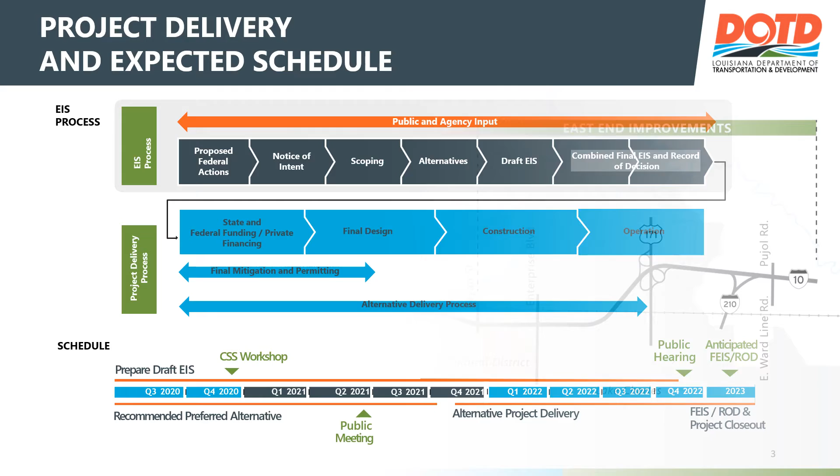The project corridor extends from I-10 at I-210 West End to I-10 at I-210 East End and is approximately 9 miles long. It crosses through the cities of Westlake and Lake Charles, which are connected by the Calcasieu River Bridge. The I-10 Calcasieu River Bridge, several overpasses, and the interstate between I-210 in Sulphur and I-210 in Lake Charles is proposed for reconstruction to meet current design guidelines to the extent practicable.

The segment of LA 378, or Sampson Street, from I-10 to Sulphur Avenue would also be improved. Improvements to interchanges at I-210 West End, Sampson Street, Enterprise Boulevard, and US 171 are also part of this project.

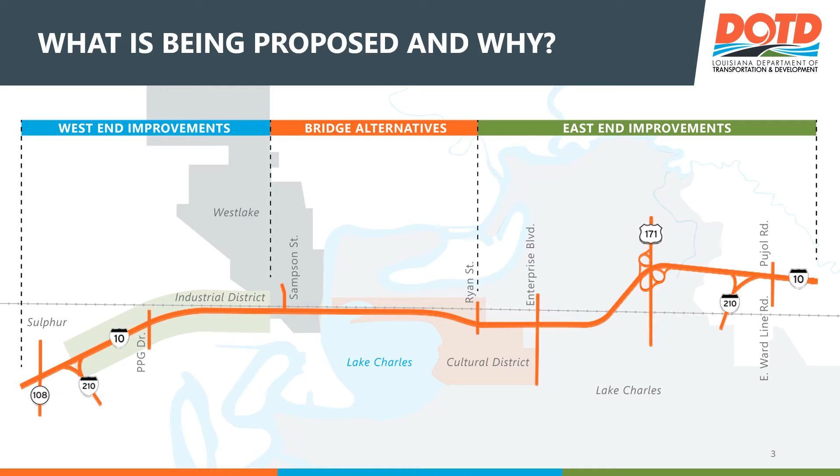A complete range of alternatives was considered for this project. A screening process narrowed these down to 3 reasonable alternatives that were presented to the public in 2021. These alternatives have been evaluated in detail in the draft EIS. The EIS identifies a preferred alternative. The final alternative will be selected in the ROD. Throughout this process, stakeholder, agency, and public input has been considered.

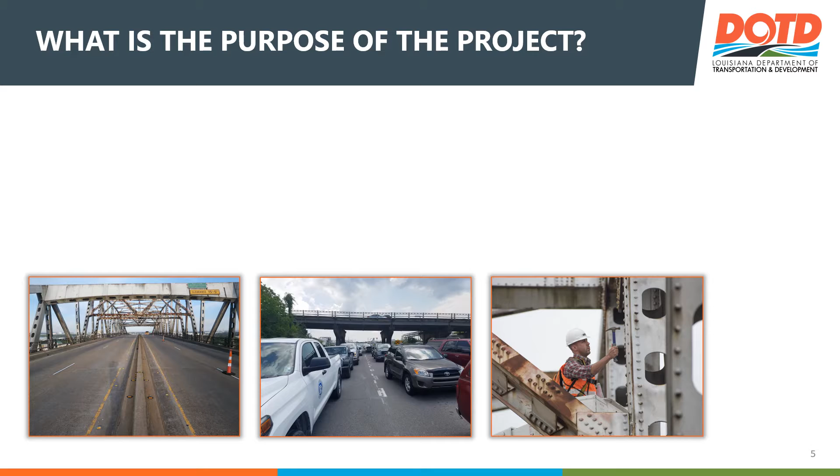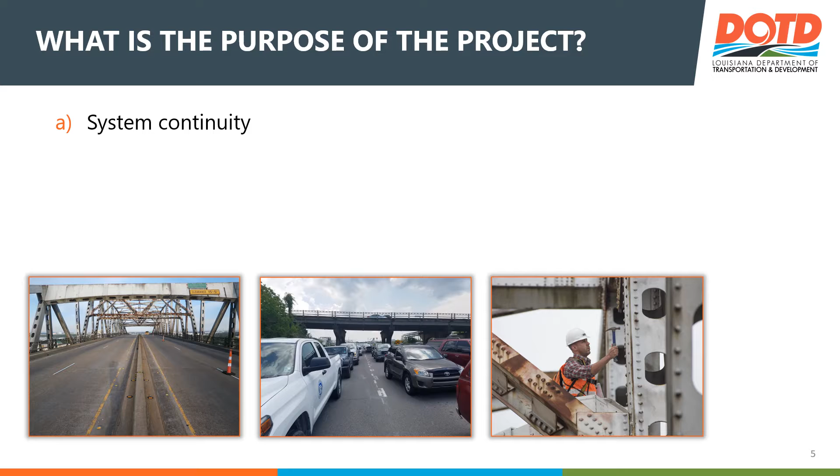Any reasonable alternative must meet the purpose and need of the project, which consists of 4 aspects. A: Address the lack of system continuity on I-10 by adding lanes to be consistently 3 lanes in each direction. B: Reduce congestion and improve mobility on I-10 and along Sampson Street by resolving bottlenecks and delays at railroad crossings. C: Correct structural and functional roadway and bridge deficiencies by meeting design guidelines and replacing aging infrastructure. And D: Address safety concerns on I-10, including the Calcasieu River Bridge.

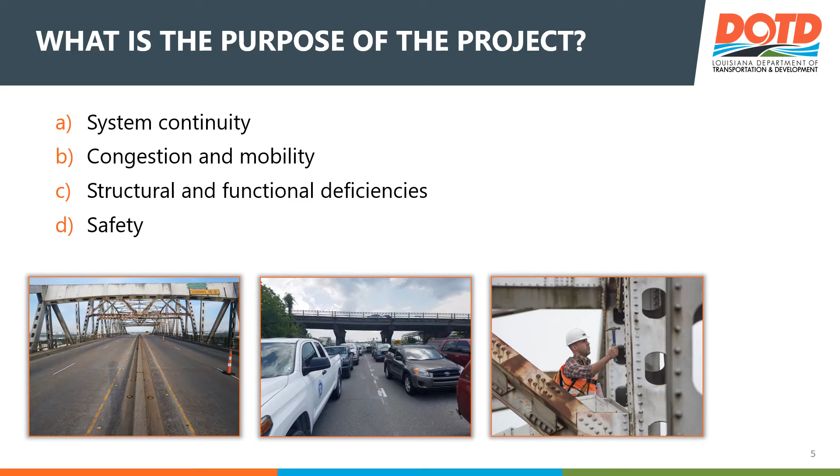Project team members at Station 3 can answer your questions about the project background and purpose and need for the project. Project team members at Station 4 can explain how these alternatives were developed. Large-scale drawings of alternatives 3A, 3E, and 5G can be viewed and discussed at Station 5.

All alternatives would provide 3 through lanes in each direction, change vertical and horizontal alignments to improve traffic operations and eliminate bottlenecks, and replace aging infrastructure such as bridges and overpasses. All alternatives will widen the I-10 Calcasieu River Bridge to 6 lanes at a minimum.

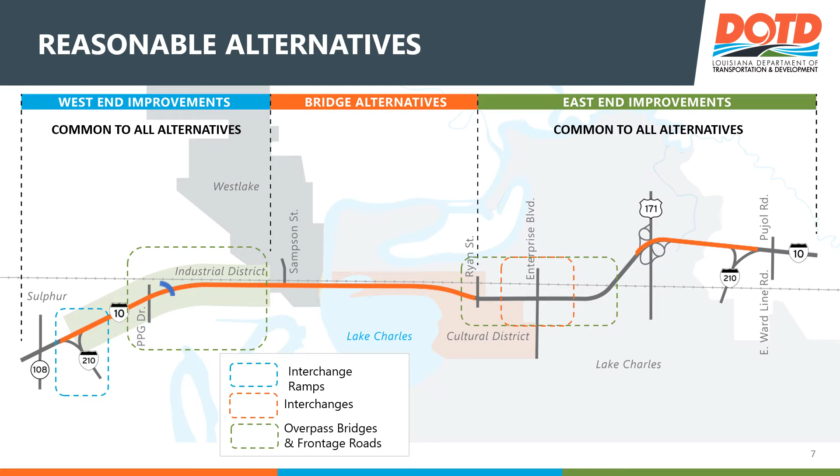Improvements at the west end and east end of the project corridor are common to all three alternatives. On the west end, common improvements include the I-10, I-210 interchange ramp and I-10 frontage roads. The US 90 overpass bridge will be removed. On the east end, common improvements include the interchange at Enterprise Boulevard and reconstruction of overpass bridges and frontage roads from Ryan to Opelousas Street. Some improvements to the interchange at US 171 will be made.

We invite you to review drawings for the build alternatives at Station 5, where project team members are available to answer your questions.

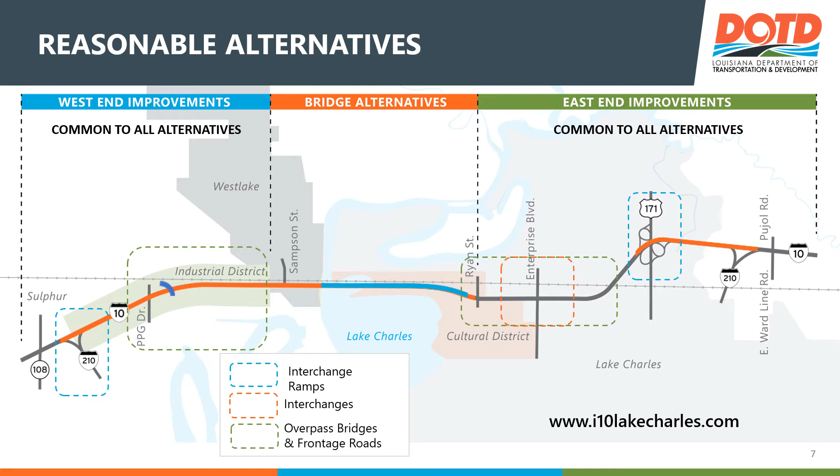Alternative 3A makes no change to existing Sampson Street. The I-10 service roads on the southwest will be improved, but the way the ramps are configured will stay the same. Sampson Street will remain as is and at grade. Traffic on Sulphur Avenue and Sampson Street North will be able to avoid the two railroad crossings of Sampson Street by using an extension of Sulphur Avenue.

A new movable bridge will be built over the river to connect to North Lakeshore in Lake Charles. This interchange provides only one eastbound on-ramp and one westbound off-ramp to and from I-10. North Lakeshore frontage roads will shift to the north along with the new I-10 alignment, but access will not change.

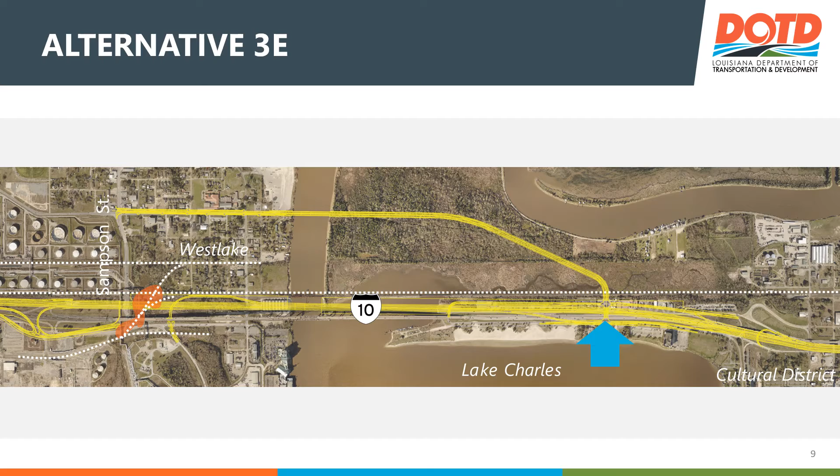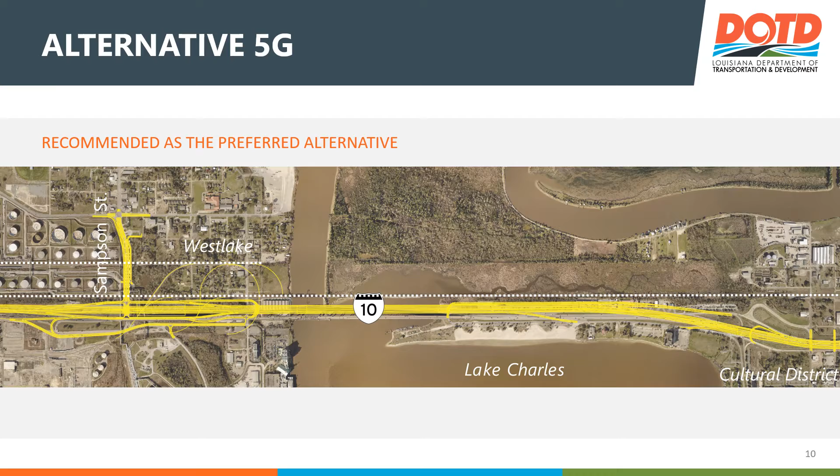The draft EIS provides detailed analysis of environmental effects, both beneficial and adverse. Copies are available for review at Station 8. You can also visit the LADOTD District Office located at 5827 US 90 in Lake Charles, or local libraries in Lake Charles, Westlake, and Sulphur to read the document. You can also access it online at www.i10lakecharles.com.

The following section summarizes the major effects and identifies issues raised by agencies and the public. The section also discusses plans for minimizing or mitigating adverse effects.

A handout with a matrix is available for you to review the environmental effects of each alternative side by side with the no-build alternative. A red highlighted result identifies a comparatively substantive impact on the resource or issue listed. Green identifies the least impact or most benefit. No highlights in a cell means the alternative results are neither best case nor worst case.

The no-build alternative is an analysis of what would happen in the future if nothing is done. It serves as a baseline or benchmark to compare the three alternatives. Even though the no-build alternative might appear to be the best case in some instances, this alternative would not and does not meet the project's purpose and need.

Section 106 of the National Historic Preservation Act protects historic and cultural resources and ensures that they are taken into consideration at all levels of the project.

Three Section 106 resources were determined to be adversely affected by the project: the existing I-10 Calcasieu River Bridge, the US 90 overpass bridge near PPG Drive, and the Norris Point Archaeological Site.

The Louisiana State Historic Preservation Office, or SHPO, agreed that this project would have no adverse effects on historic above-ground resources other than these bridges, both of which are covered by the DOTD's Historic Bridge Programmatic Agreement, or PA. SHPO also agreed that replacement of these two bridges is the most appropriate action. Both bridges were offered for relocation through DOTD's Historic Bridge Marketing webpage.

The Norris Point Archaeological Site is within the new right-of-way for the replacement I-10 bridge, but it is not sufficiently intact to be considered significant. Data recovery of artifacts for curating and study has been selected as appropriate mitigation for this site.

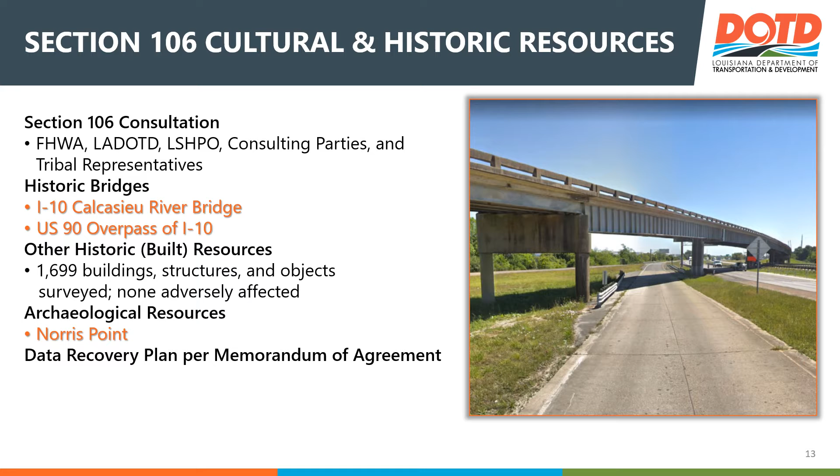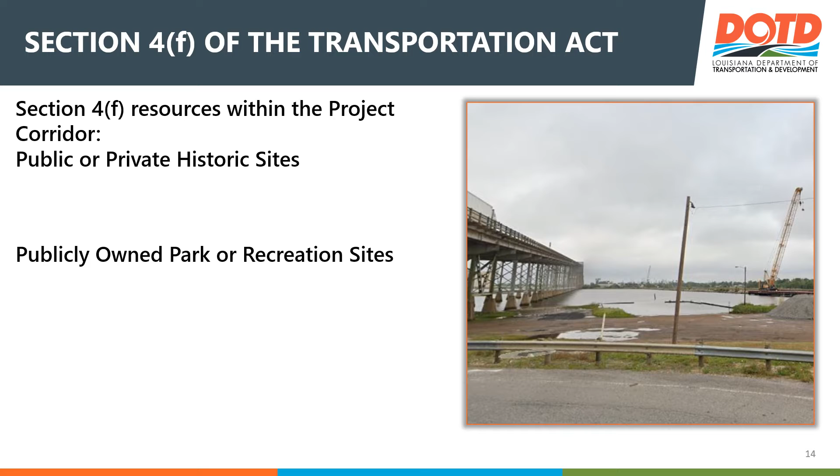Section 4(f) of the Transportation Act is another law that protects certain properties. Section 4(f) requires consideration of the adverse effect on occupancy of properties, known by its legal term of use, by a transportation project. Section 4(f) recreational properties at the Lake Charles lakefront were identified, but it was determined that these would not be used by the project.

Section 4(f) also does not apply to the boat launch under the I-10 bridge on North Lakeshore Drive because the boat launch will be closed. LADOTD is the owner of this boat launch, and it determined that the launch is not significant. FHWA concurred that Section 4(f) does not apply to this property.

FHWA also evaluated and approved the use of the I-10 Calcasieu River Bridge and the US 90 overpass because there are no feasible and prudent alternatives to the use of these bridge structures. Copies of the evaluations and approvals are available at Station 6 and in Appendix N of the DEIS located at Station 8.

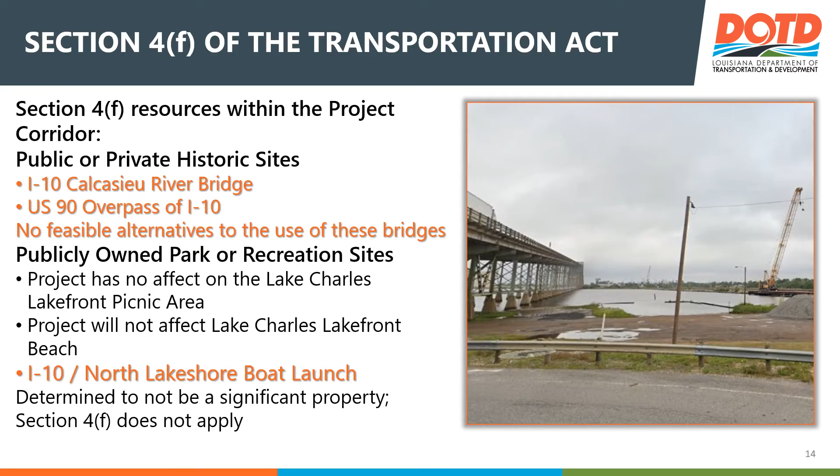Because Alternatives 3A and 3E propose to cross the river and build an elevated structure through undeveloped forested wetland in Lake Charles, they would cause more impacts to protected habitats than Alternative 5G. Other natural resource issues considered were air quality, water quality, including public water wells, and farmlands.

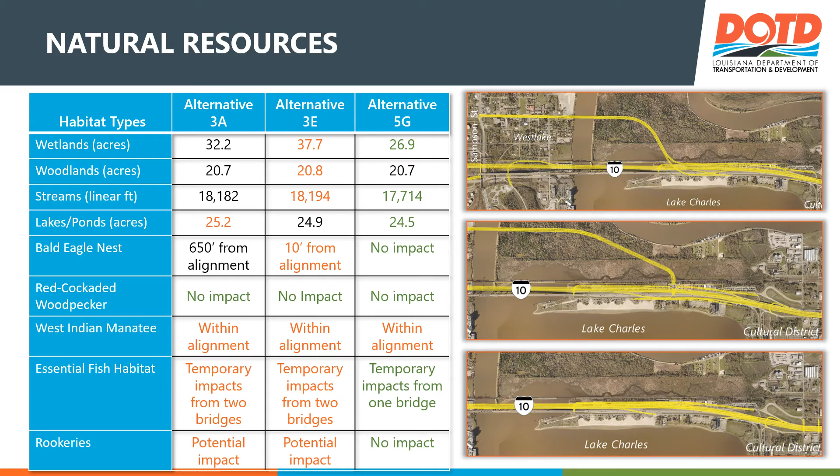Traffic noise was modeled for existing and future conditions with and without the proposed project. Model results show that Alternative 5G would cause the fewest number of receptors to be impacted by noise. A receptor is the location of a noise-sensitive area, such as a residence, church, business, or park.

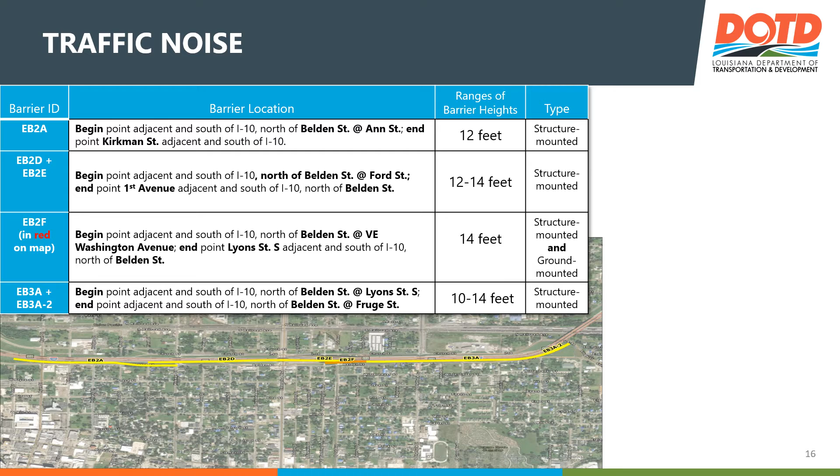When traffic noise impacts are identified, noise abatement will be considered and evaluated for feasibility and reasonableness. Noise barriers, or noise walls, are the most common method used to lessen traffic noise.

Most of the noise barriers will be structure-mounted. The noise barrier at location EB2A will be 12 feet tall. The noise barrier at locations EB2D and EB2E will range from 12 to 14 feet tall.

The noise barrier at location EB2F, shown in red on this map, will be 14 feet tall and will be a combination of ground-mounted and structure-mounted. The noise barrier at locations EB3A and EB3A-2 will range from 10 to 14 feet tall.

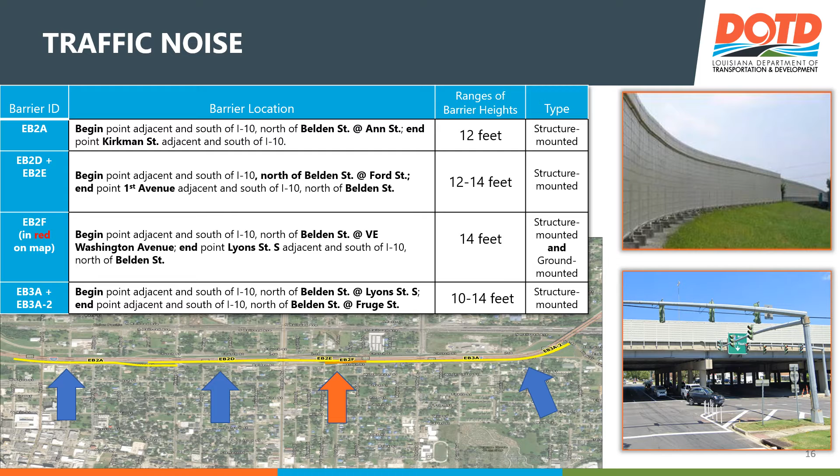All bridges are considered navigation obstructions and are tolerated only as long as they serve the needs of land transportation and allow for the reasonable needs of navigation.

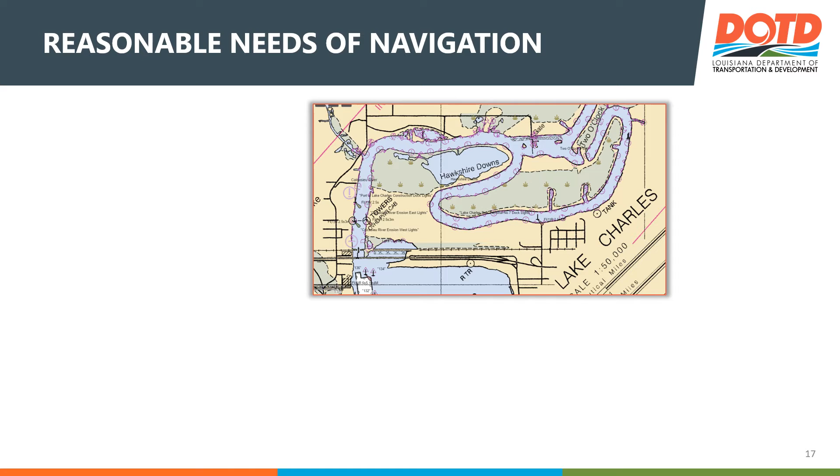The vertical clearance of the replacement I-10 bridge would be lowered from 135 feet to 73 feet. This clearance applies to all three alternatives. The UP Railroad Bridge north of I-10 would not change and would keep its unlimited vertical clearance when open. Alternatives 3A and 3E would introduce a third bridge, which would be movable, north of the UP Bridge.

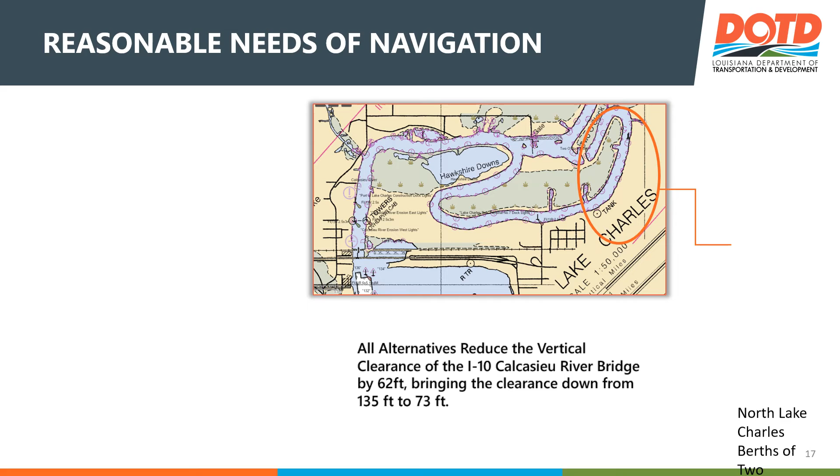Two navigation interests with locations upriver in North Lake Charles would be affected by this vertical clearance change. Mitigation to address impacts to their operations is being developed.

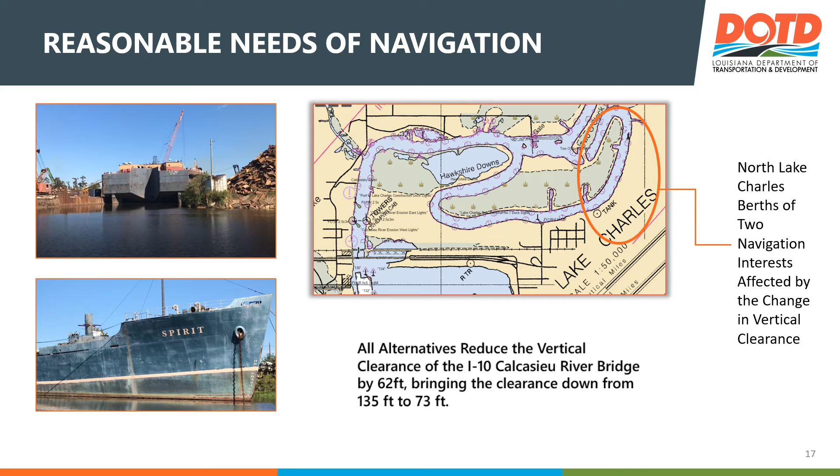Traffic analysis confirmed that all alternatives would meet the project purpose and need for reducing overall traffic congestion. Bottlenecks at Sampson Street and the I-10 Calcasieu River Bridge would be mitigated, and traffic operations would be equal to or better than the no-build alternative.

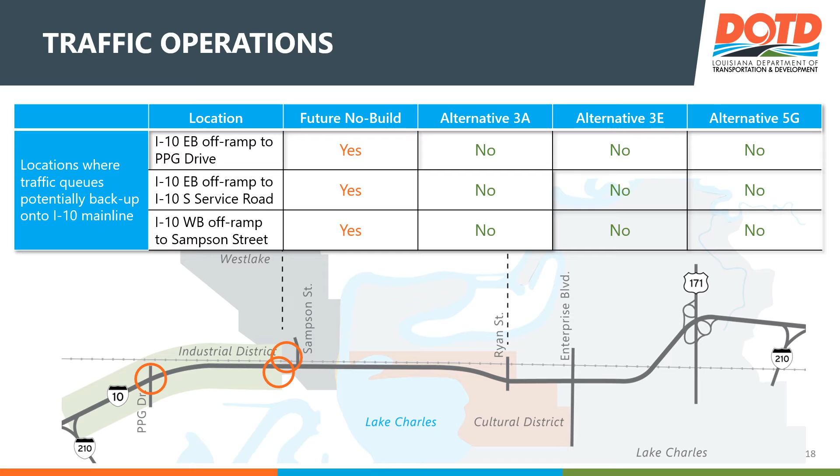Backups that would potentially affect the I-10 main line in the future, without the project, would be resolved by all build alternatives.

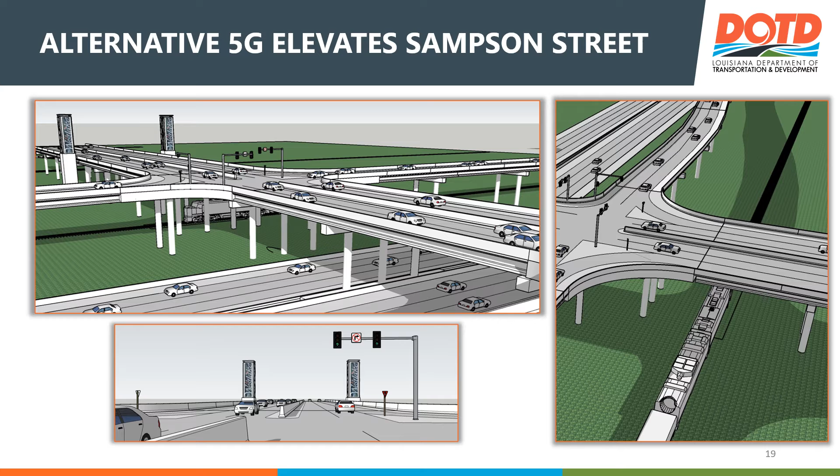Random disruptions from freight trains that cross on the UP and KCS tracks at Sampson Street is a major traffic issue. Alternative 5G has the advantage of raising Sampson Street on structure and crossing over the railroads. It would also avoid the addition of a third movable bridge, which would cause random traffic disruptions.

A disadvantage of Alternative 5G is that it would require the existing railroad spur tracks to be relocated. The proposed clearance at the current location does not allow trains to pass under the new bridge approach.

Relocation options were presented to the railroads and to Westlake leaders. The UP spur would move east for all options. 3 options were presented to KCS.

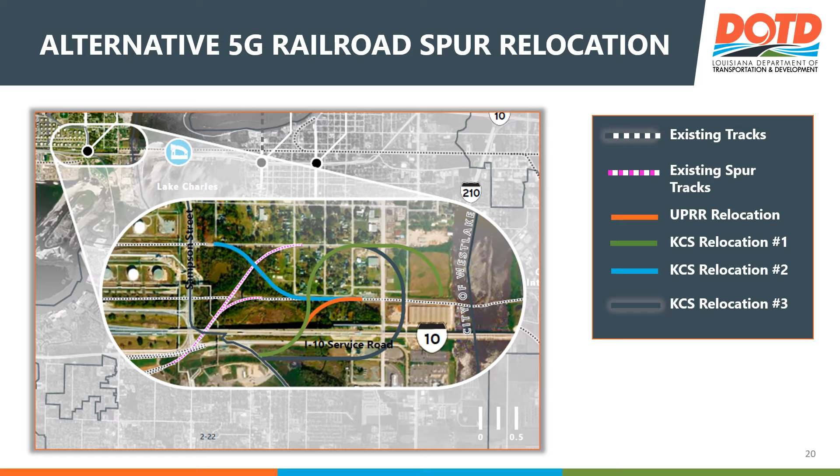Railroad relocation number 2 was identified as the option that would best serve all interests. As shown here, 3 existing crossings would be closed, and a total of 6 new or existing crossings would be improved with warning gates and flashers.

The tracks south of Isle of Capri Boulevard, which are currently out of service, would be rehabilitated and put back into use for KCS.

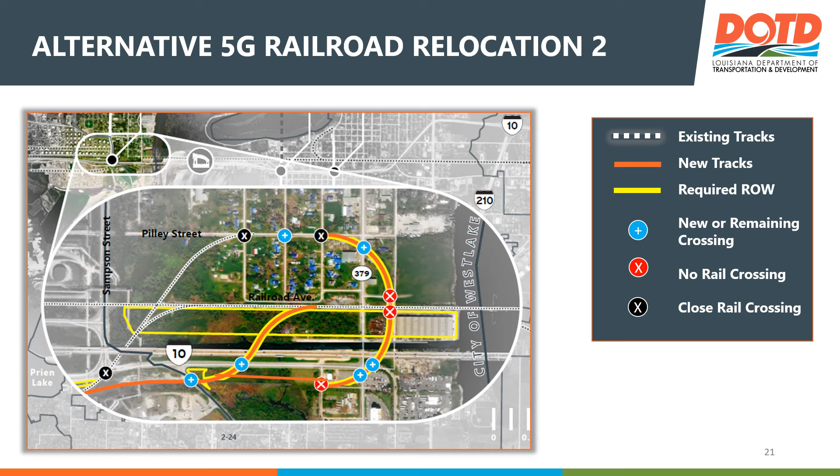Another disadvantage of Alternative 5G would be the closure of Sampson Street temporarily during construction. At a meeting with Westlake leaders and stakeholders, this issue was discussed. If Alternative 5G were built, Sampson Street would be completely closed for a period of approximately 18 months.

On the interstate, 2 lanes of traffic in either direction would remain open during construction. Occasional and short-term closures would occur as needed.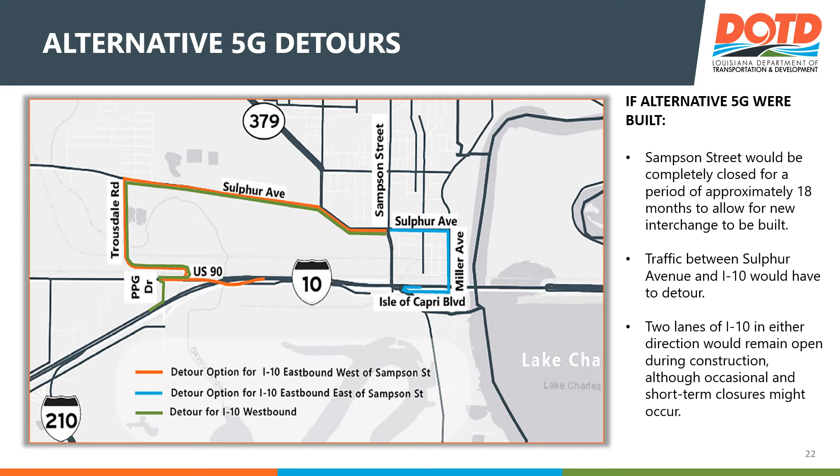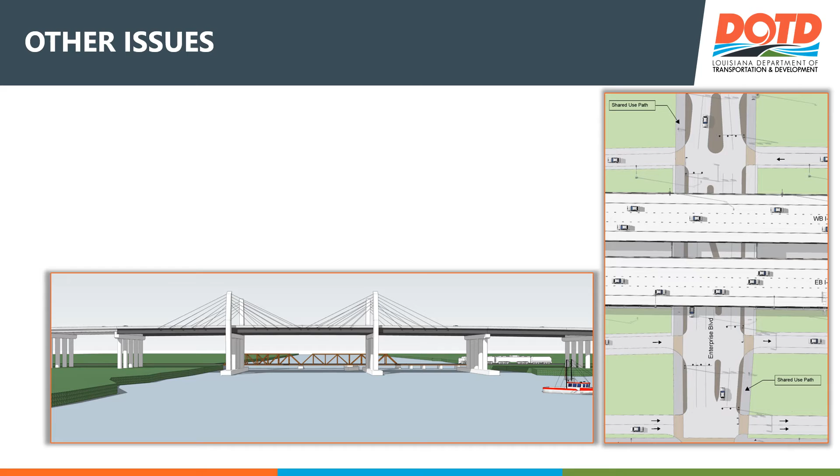As you will see on the impact matrix in your handout, a number of other issues were considered and compared. Residential neighborhood impacts from street connection closures, noise barriers, and control of access implementation were all identified in the draft EIS. Visual effects, both beneficial and adverse, from sections of the project that will be elevated on structure will be addressed during final design.

Concerns about the design of the new I-10 Calcasieu River Bridge and the addition of bicycle and pedestrian facilities will continue to be discussed with local sponsors represented by the Metropolitan Planning Organization, formerly known as the Imperial Calcasieu Planning Commission, or IMCAL. Business and residential displacements will be addressed by the LADOTD Real Estate Division.

A representative is available to discuss the right-of-way acquisition and relocation assistance process at Station 7.

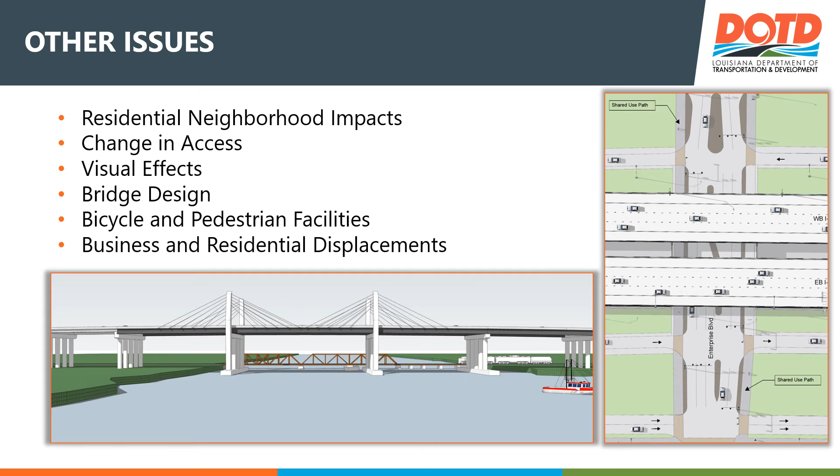Actions to minimize disturbing groundwater and soils are being planned, and those actions will be incorporated into the contractor's work plan. Soil and groundwater sampling and air quality monitoring will be conducted during all ground-disturbing activities. Further evaluation for right-of-way property acquisitions will be undertaken as needed.

A workers' safety and protection plan will be developed, and workers will be trained to comply with the plan and execute emergency responses as needed. The appropriate personal protective equipment, PPE, will be provided.

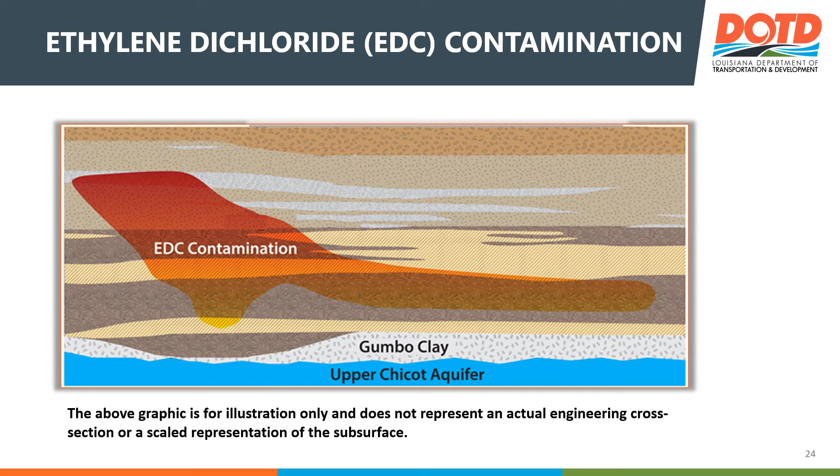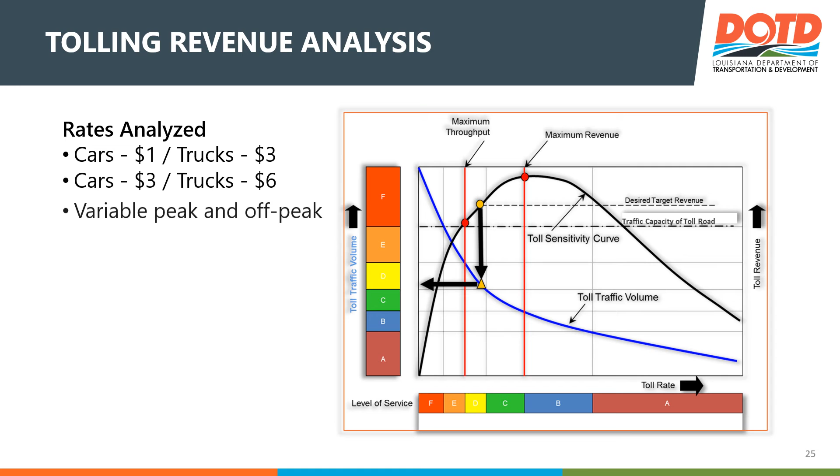Another issue is how the public will be affected by tolling of the I-10 Calcasieu River Bridge. A feasibility and revenue analysis was performed showing that nominal toll rates would provide substantial revenue for funding of the replacement bridge.

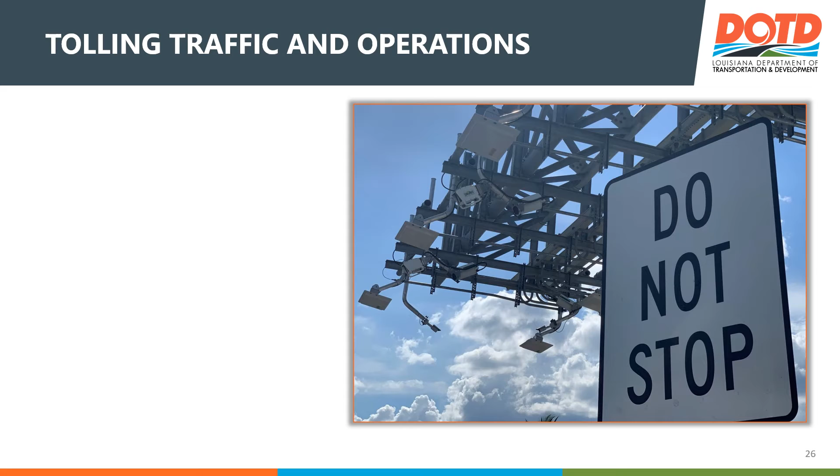Although actual toll rates have not been determined, a special toll rate not to exceed $2.88 in 2021 dollars for local automobiles has been established. Tolls will be collected electronically. To capture the discount, local autos will have to use a transponder.

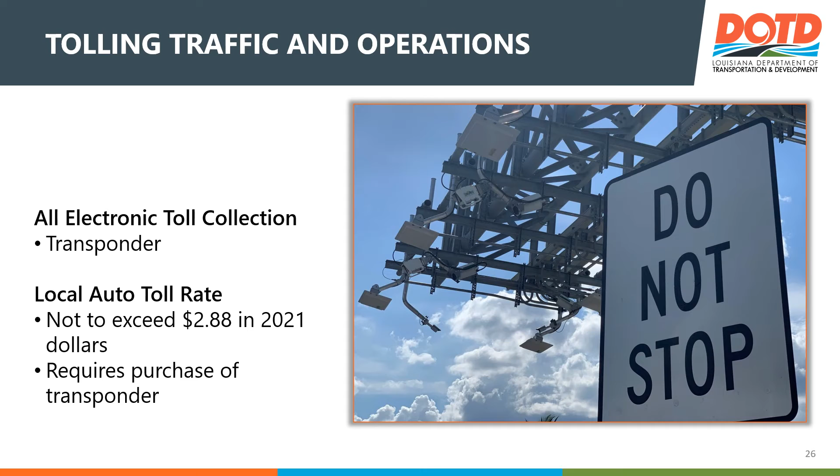Non-local vehicles will pay rates established by LADOTD and the P3 concessionaire. If they do not have a transponder, these vehicles will be photographed and sent an invoice. All crossings of the Calcasieu River would be tolled, no matter which alternative is selected. The only toll-free route will be I-210 and the much longer detour to the north through Moss Bluff.

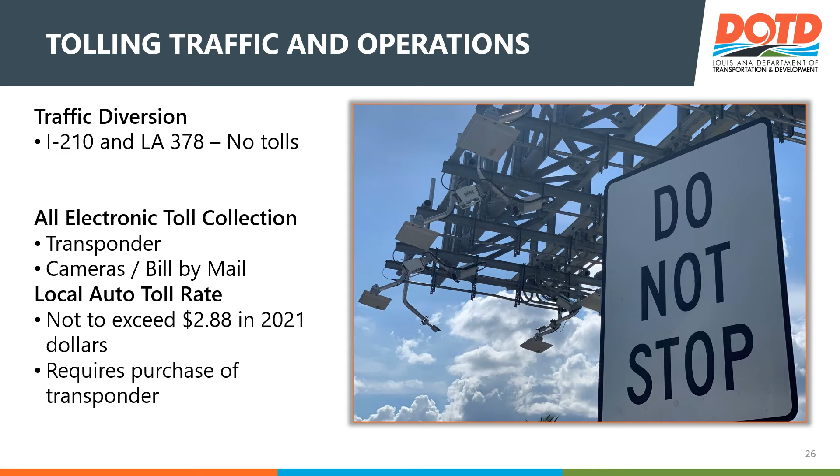Tolling will cause some traffic to divert away from I-10 to avoid paying the toll. The tolling analysis also predicted that most of the traffic diverting would use I-210.

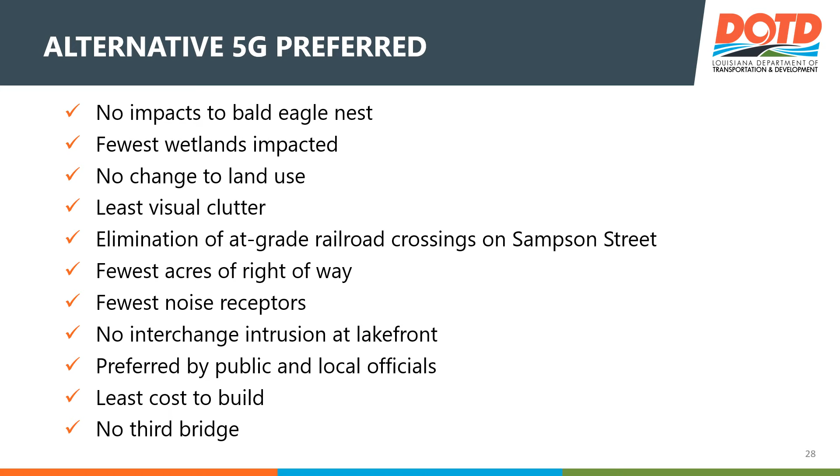A preferred alternative has been recommended. The basis for this recommendation is detailed in the draft EIS. Based on comparison of the three alternatives and public local input, Alternative 5G is identified as the preferred alternative for the I-10 Calcasieu Bridge Improvements Project. A list of reasons for this identification is provided in your handout.

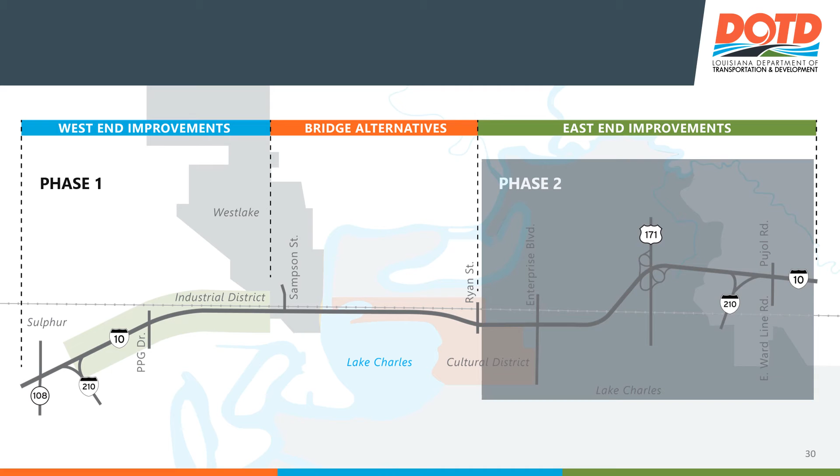The full extent of the I-10 Calcasieu Bridge Improvements Project will be built in two phases. The first phase includes the new I-10 Calcasieu River Bridge and improvements from I-210 West End to Ryan Street. Tolling will commence as soon as the new bridge is opened as part of the project's financing package.

After the combined FEIS and ROD is issued, the P3 developer will complete the final design and permitting, then construct, operate, and maintain the facility and collect tolls for a period of 40 to 50 years. No schedule for the second phase of the project from Ryan Street to US 171 has been decided.

LADOTD has prepared a brochure about how its acquisition of right-of-way and relocation assistance program is implemented. Please see the real estate representative at Station 7 to ask questions about the process and for a copy of the brochure.

Any individual, family, business, or farm displaced by a federal or federally assisted program shall be offered relocation assistance services for the purpose of locating a suitable replacement property. Any individual with a disability will be provided the assistance needed to locate and move to a replacement dwelling or site. The individual should notify LADOTD of any special requirements for assistance.

Relocation services are provided by qualified personnel employed by LADOTD. It is their goal and desire to be of service to you and assist in any way possible to help you successfully relocate. Remember, the LADOTD's representative is here to help and advise you, so please be sure to make full use of their services. Ask questions and be sure you understand all your rights and benefits.

There are 3 steps to the acquisition process. First, owners of required properties may be contacted by an appraiser or appraisers and given the opportunity to go with them on the inspection of the property. This will provide owners an opportunity to point out things that may be important to the evaluation of the property.